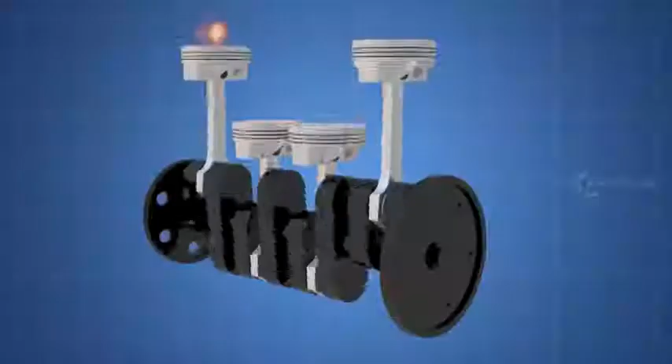A car engine is basically an internal combustion engine where power is generated through expansion of high temperature and high pressure gases. A lot of heat is generated due to the combustion gas and the friction of mechanical parts. For sustained operation, this excess heat should be removed from the engine and kept at operating temperature.

Now let's see the parts involved in cooling the engine. The main parts for cooling the engine are water pump, radiator, thermostat, coolant temperature sensor, and coolant.

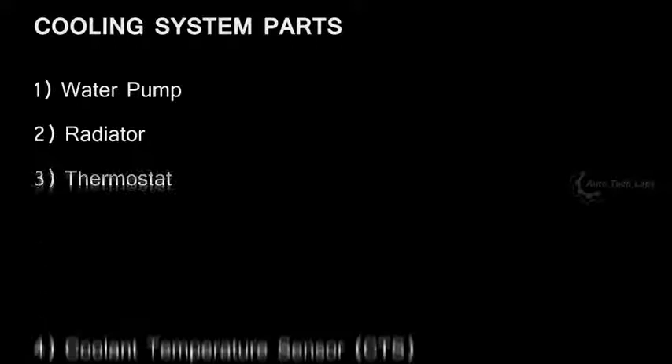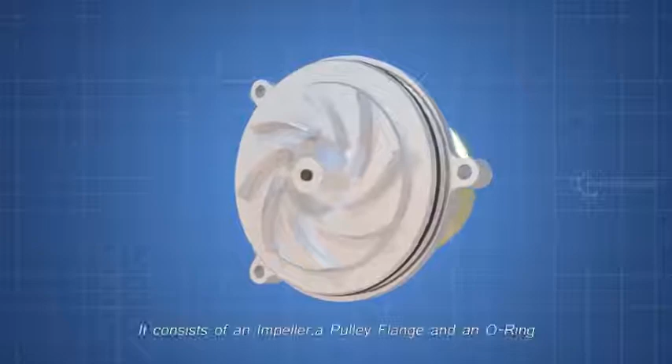First, the water pump. Water pump is the heart of the cooling system, which pumps the coolant. It consists of an impeller, a pulley flange, and an O-ring. The impeller is driven by the engine drive belt through a pulley.

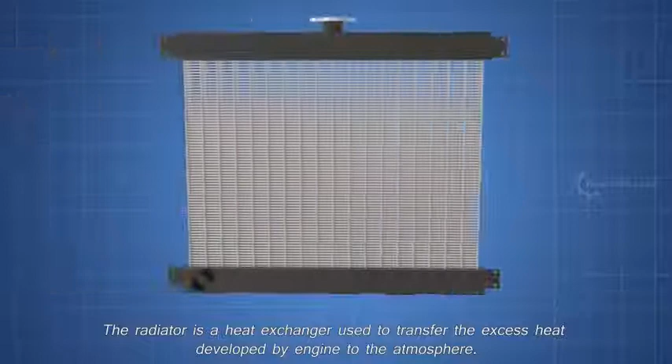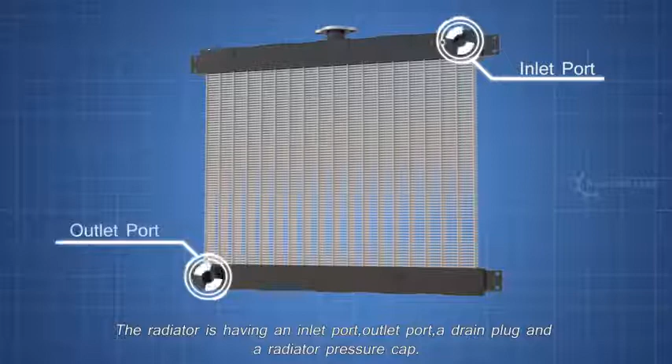Next, the radiator. The radiator is a heat exchanger used to transfer the excess heat developed by the engine to the atmosphere. The radiator has an inlet port, outlet port, a drain plug, and a radiator pressure cap. The radiator pressure cap plays a vital role in the cooling system, which will be explained later.

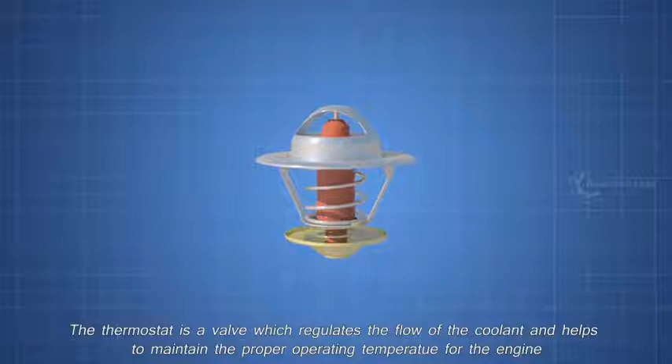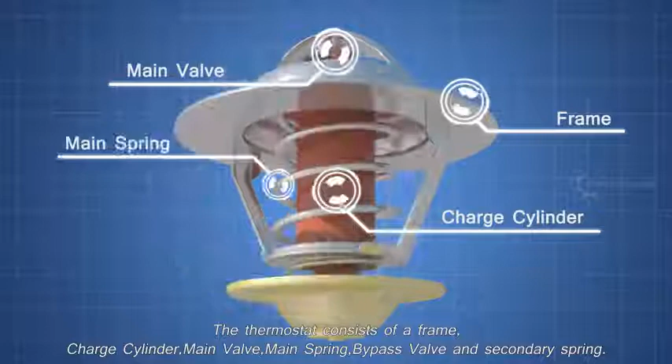Next, the thermostat. The thermostat is a valve which regulates the flow of the coolant and helps to maintain the proper operating temperature for the engine. The thermostat consists of a frame, charge cylinder, main valve, main spring, bypass valve, and secondary spring.

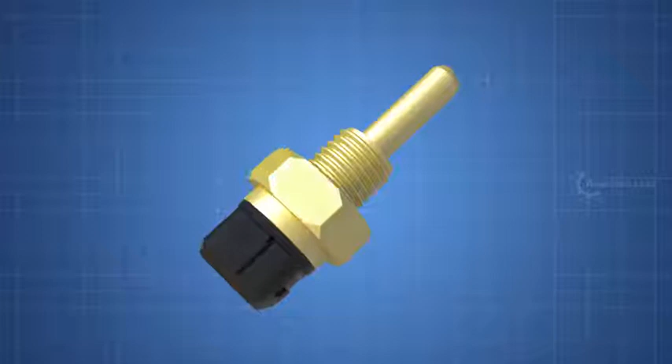Next, the coolant temperature sensor. The coolant temperature sensor is used to monitor the engine temperature. The ECU will use this data to manage fuel injection and ignition time. Some engines have more than one coolant temperature sensor. The data is also used to control the radiator fan and to update the temperature gauge on the driver console.

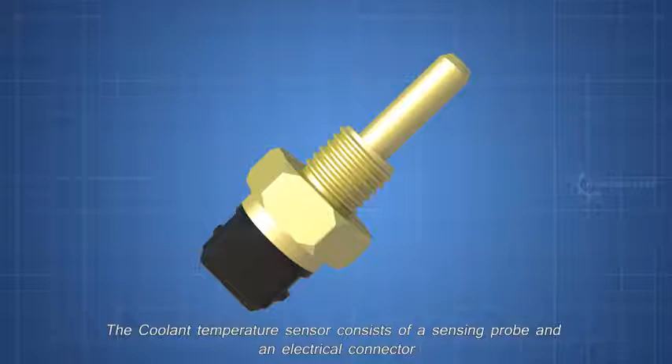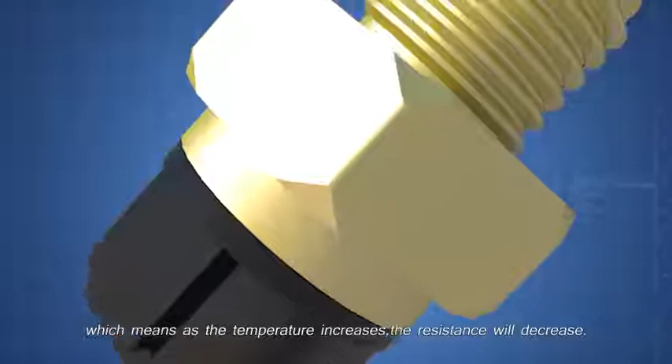The coolant temperature sensor consists of a sensing probe and an electrical connector. Most coolant temperature sensors are negative temperature coefficient type, which means as the temperature increases, the resistance will decrease. The CTS can be a 2-pin type or a 3-pin type, depending on the make of the vehicle. These are the main parts involved in an engine cooling system.

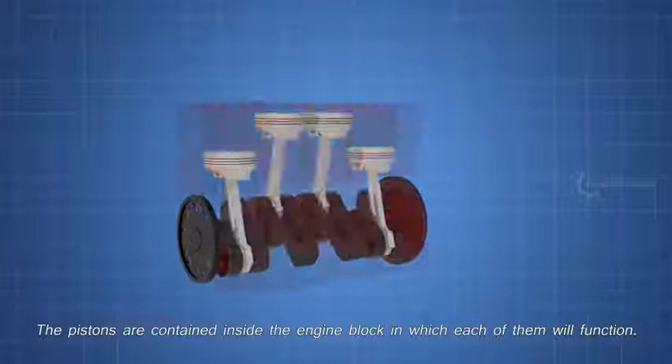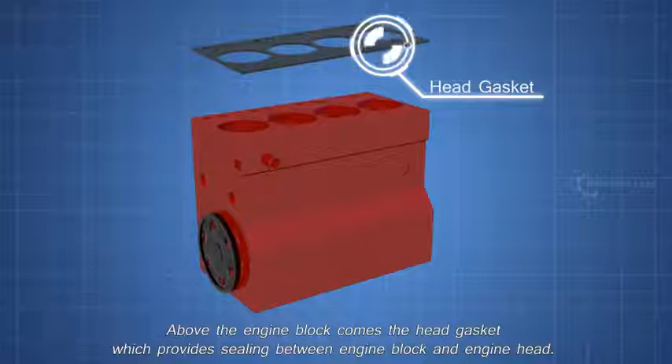Now, let's see how these parts work together. The pistons are contained inside the engine block, in which each of them will function. Above the engine block comes the head gasket, which provides sealing between engine block and engine head. It avoids compression leaks and oil or coolant leaks into the cylinders. Above that comes the engine head.

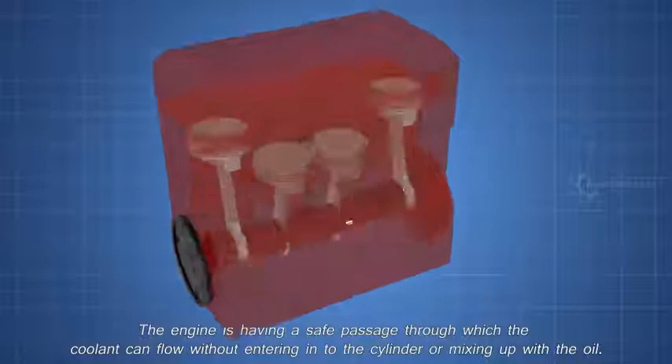The engine has a safe passage through which the coolant can flow without entering into the cylinder or mixing up with the oil. This passage is known as the water jacket. Let's put the parts one by one and see how it works.

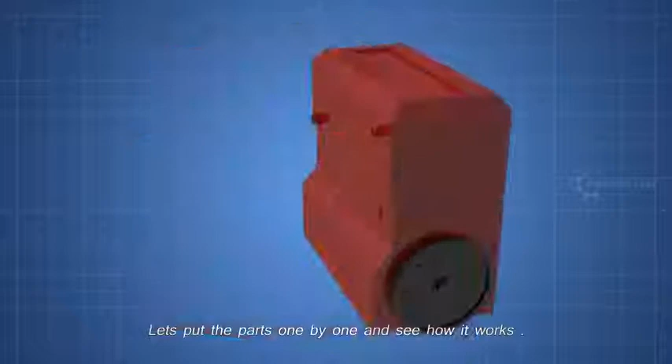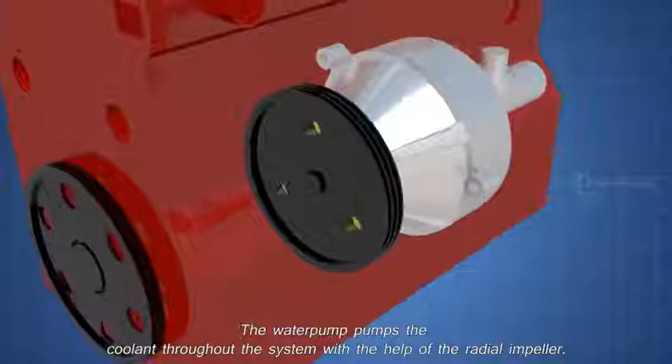The water pump pumps the coolant throughout the system with the help of the radial impeller. It is driven by the engine itself, using a serpentine belt. The serpentine belt also drives the power steering pump, alternator, and AC compressor. But for now only the water pump is shown.

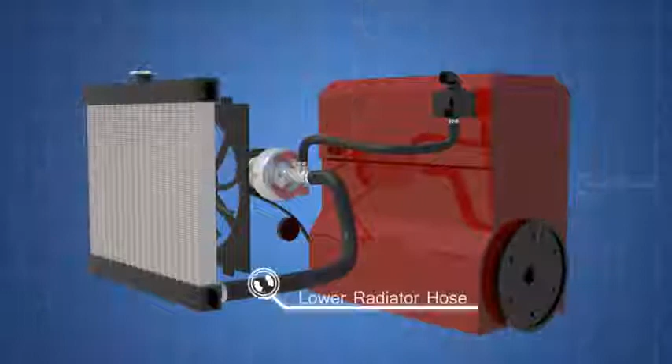Now let's see the connections. The thermostat bypass hose. The thermostat housing. Inside the thermostat. The radiator, and the radiator fan. The lower radiator hose. The water pump outlet hose. The upper radiator hose. The coolant expansion tank. The expansion bleed hose.

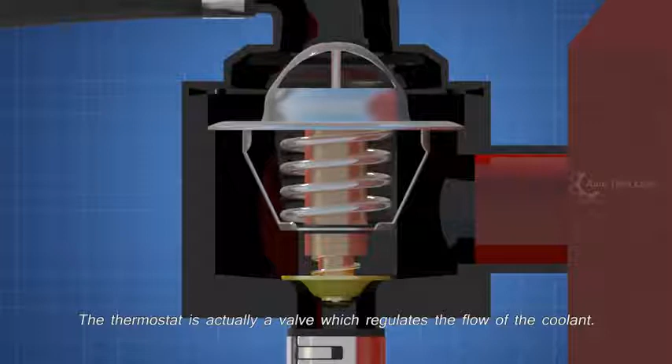Coolant overflow hose. So, finally, let's get into the working, starting with the thermostat. The thermostat is actually a valve, which regulates the flow of the coolant. It will always be covered in the coolant, so that the temperature can be sensed. Let's start the operation from a cold engine.

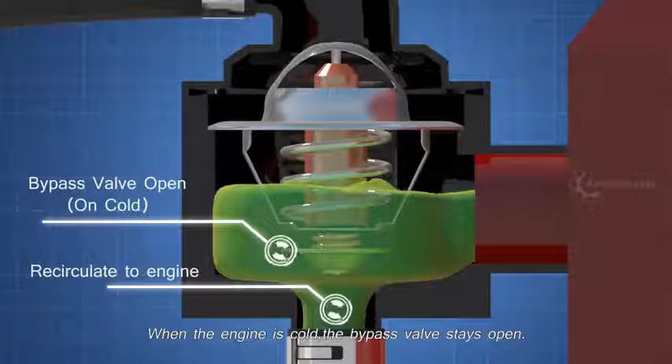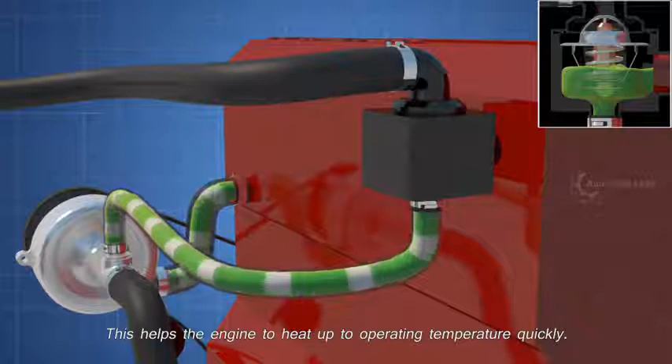When the engine is cold, the bypass valve stays open. So, the coolant bypasses the radiator and recirculates through the engine. This helps the engine to heat up to operating temperature quickly. Eventually, the coolant temperature increases by absorbing the heat from the engine.

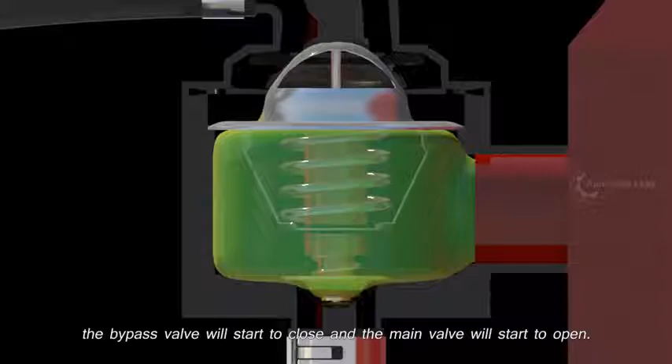Once the coolant starts to reach higher temperature, which is usually between 160 to 190 Fahrenheit, the bypass valve will start to close, and the main valve will start to open. This allows the cold coolant from the radiator to flow to the engine side, and the hot coolant from the engine side to flow to the radiator.

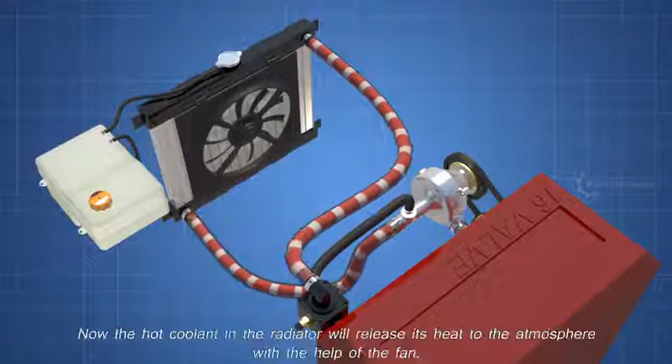In most cars, the coolant temperature sensor is located near the thermostat housing. It will turn on the radiator fan if the coolant to the radiator side is at high temperature. Now, the hot coolant in the radiator will release its heat to the atmosphere with the help of the fan. At the same time, the cold coolant received from the radiator will start to absorb the heat from the engine for the next cycle.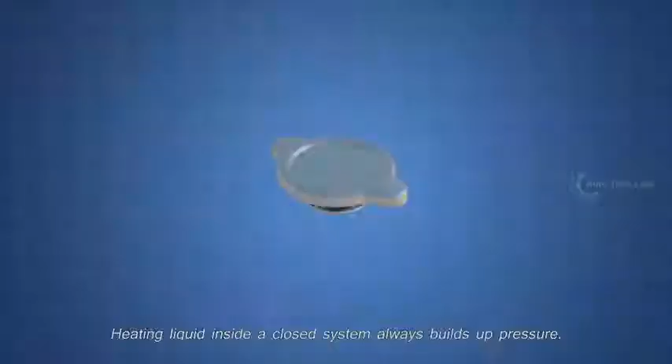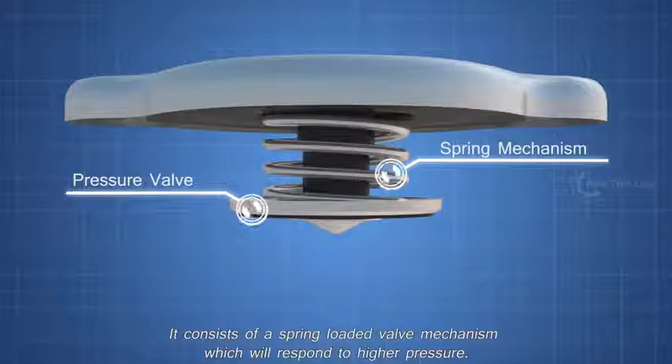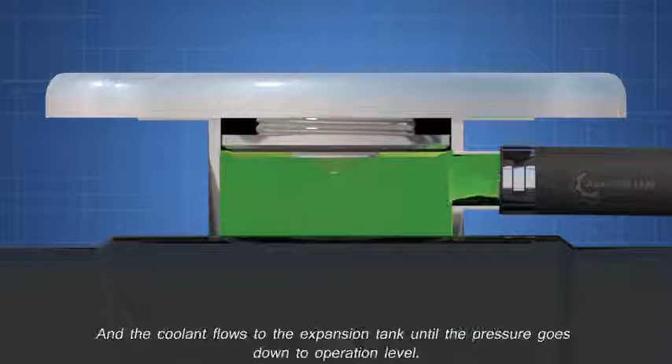Heating liquid inside a closed system always builds up pressure. So, how to maintain the pressure? Here comes the role of the radiator pressure cap. It consists of a spring-loaded valve mechanism, which will respond to higher pressure. Reaching a pressure above 15 psi will push the pressure cap valve, and the coolant flows to the expansion tank, until the pressure goes down to operating level.

And when the system cools down, the vacuum inside the system sucks back the coolant from the expansion tank. In case there is too much pressure buildup in the system, due to trapped air or other failures, the coolant in the expansion tank will be pushed out through the overflow hose.

The car heater system is a part of the engine cooling system. The heater system comprises the heater core, inlet and outlet hoses, and a heater control valve, which is optional and cannot be found in all vehicles. The heater core acts as a radiator, dissipating heat from the hot coolant to the vehicle interior using a blower.